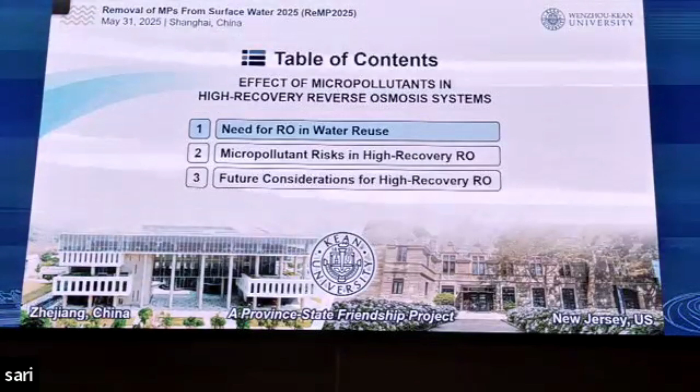...of the micropollutants in high recovery reverse osmosis systems. So let's talk about the need for reverse osmosis in water reuse. We have different water resources available, and each country, depending on their situation, utilizes different water resources. For example, China has a high amount of surface water or groundwater, so they can rely more on supply water or wastewater treatment.

But some countries, like the Middle East area, rely on desalination because they don't have enough surface water sources. And with climate change, the water sources are changing. As you can see on the right figure, desalination and water usage is increasing dramatically. Especially for desalination, membrane-based desalination is dominant right now, and thermal desalination is declining because of the energy usage.

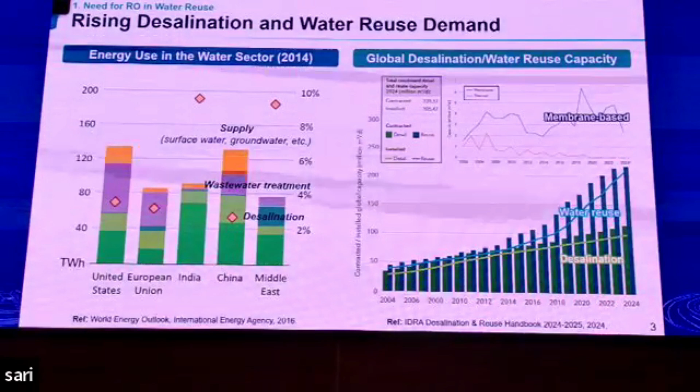Let's talk about desalination and water reuse. For desalination, as I mentioned, Middle East countries focus more on desalination, but seawater desalination demand is also increasing in non-traditional regions. For example, Singapore focuses on independent water security because they import water from Malaysia. Australia experienced big droughts and floods, so they are even expanding their Sydney desalination plant. And Chile has a rising mining industry.

South Korea actually also has abundant water resources, but because of seasonal variation and climate change, they are installing a new big desalination plant for industrial development. And China, due to industrial demands and droughts, is increasing seawater desalination, especially in the northeast region of China. They have factories and need SWRO desalination for water supply.

But the problem of desalination is energy consumption. In 2019, I collected data and analyzed the energy consumption of desalination plants. At the time, the lowest desalination plant SEC was about 3.0 kilowatt hours per cubic meter. After 6 years, we did the analysis again, and it shows that energy consumption can reach 2.8 with larger capacity and advanced membrane technologies.

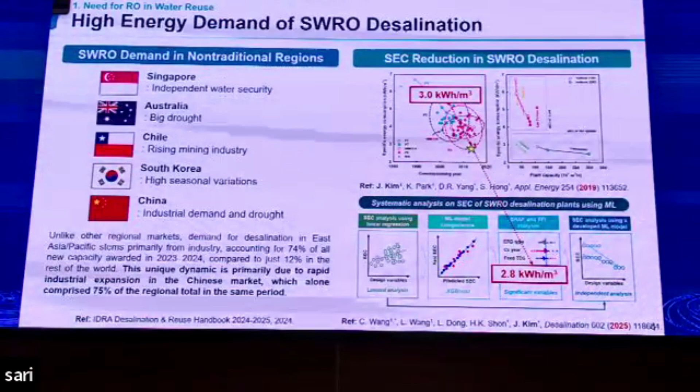But still, its energy consumption is dramatically higher than surface water treatment, so we can focus more on water reuse because it has lower salinity, so the treatment energy consumption can be lower. In the graph, the Asia Pacific region and Middle East and Africa focus more on water reuse. For example, Kuwait has a large water reuse plant and utilizes RO as the end step. Singapore, as is well known, for NEWater utilizes RO and UV for reuse purposes. And Australia also has it.

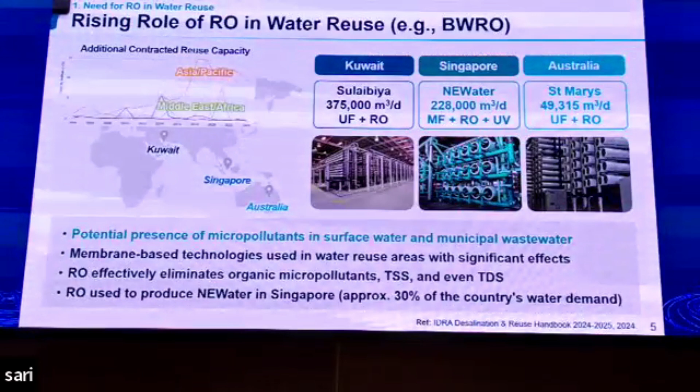RO actually eliminates organic micropollutants, suspended solids, and even TDS, so it can be a promising solution for water reuse. When I saw the description of REMP, I was a little bit curious and nervous because micropollutants are not my research. But still, surface water or municipal wastewater treatment can be my research. And for advanced water treatment technologies, I focus on high recovery RO, so low removal rate, low permeance and fouling can be my work scope.

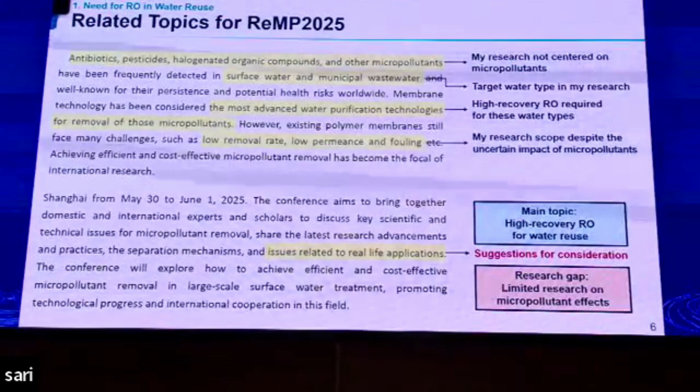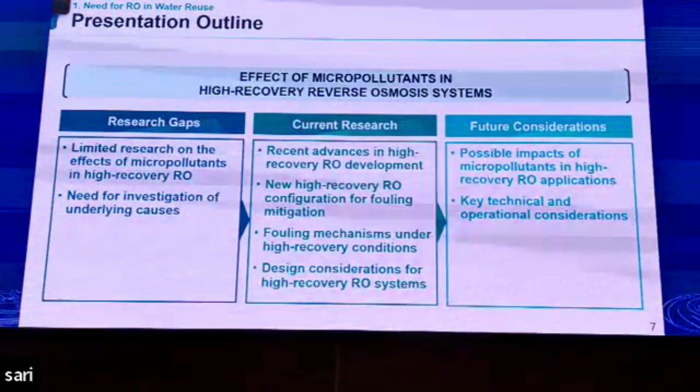So my talk will focus on high recovery RO for water reuse. My research might be limited regarding micropollutant effects, but at least I can suggest some points for consideration, because we have different expertise like membrane synthesis and processes. So I will share my research and some questions we can think about together for micropollutant removal in high recovery reverse osmosis.

I will explain the BWRO configuration first. For water reuse, we are using brackish water reverse osmosis. Reverse osmosis, as you know, has a lower recovery rate. Single stage or single pass is the general configuration, but because of the low recovery rate, they install an additional stage, like 2-stage. For low saline water, they install it without the interstage booster pump to increase water recovery. For higher salinity water, they utilize the interstage booster pump so they can boost water production in the later stage.

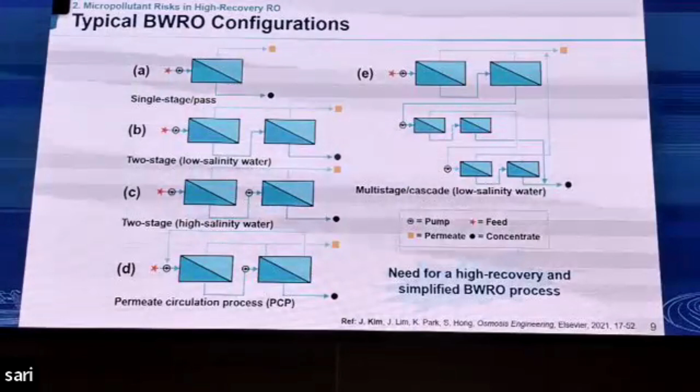A more developed BWRO configuration utilizes a split partial concept for the second stage, recirculating the relatively high saline permeate back to the feed water to keep both quality and quantity. For further expansion, they can utilize multi-stage or cascade designs to increase recovery up to 98%. Some desalination plants adopt this as their second pass design to increase water production. Likewise, for water reuse or brackish water reverse osmosis, high recovery is needed. At the same time, as you can see, BWRO designs are complex, so there should be simplified BWRO processes.

So the current research focuses on the semi-batch or batch design. Multi-stage RO utilizes additional stages for the RO, but this will occupy larger spaces and capital costs. So they are utilizing the concentrate again back to the feed and increase the recovery with the compact size.

And recent studies focus on batch reverse osmosis as well, but that one is a little bit difficult to apply in real cases because there are some pressure control points. So semi-batch RO is utilized much in the industry and recent academia. And the feature of this semi-batch RO is they have a plug flow or closed circuit mode, which means they are discharging and concentrating at the same time.

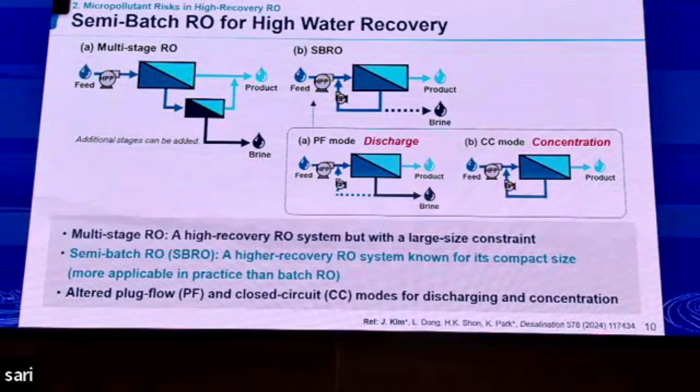And many field and modeling studies have been conducted for the semi-batch RO, but what I realized is their focus and their characteristics can be a little bit different. So for the field study, for example, DuPont has their own semi-batch RO design, called CCRO, and they have a lot of pilot scale applications for the brackish water reverse osmosis condition.

But for the modeling study in academia, they focus more on SEC. So energy consumption is their target for study. But as you can see, practical conditions were not considered in the modeling studies in academia. They don't consider its capacity, and even the recovery is extremely high compared to their feed condition. And also, they don't consider water flux, which is a very critical parameter for plant design.

And even the pump efficiency is extremely high, so they claim the semi-batch RO is an extremely low energy consumption RO configuration, but actually it is not. This is very different from the reality. And also the permeate TDS in real conditions is very important, but in the modeling condition, they don't consider it and ignore it. So those are the differences in the field and modeling studies.

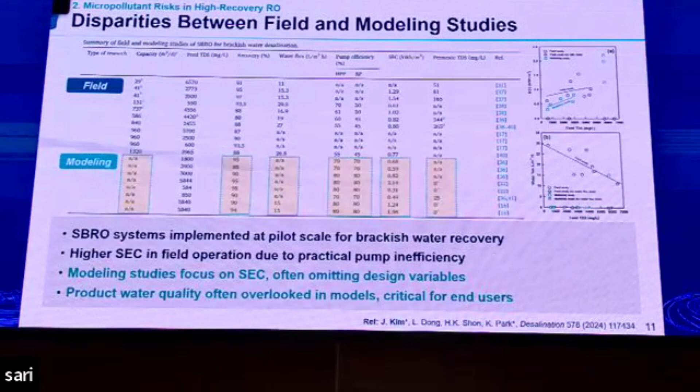And let's think about what will be the potential consideration for micropollutant removal. So I plotted some data for the practical energy consumption range and target recovery based on TDS condition. And also plotted the concentration changes on the concentration side and on the permeate side.

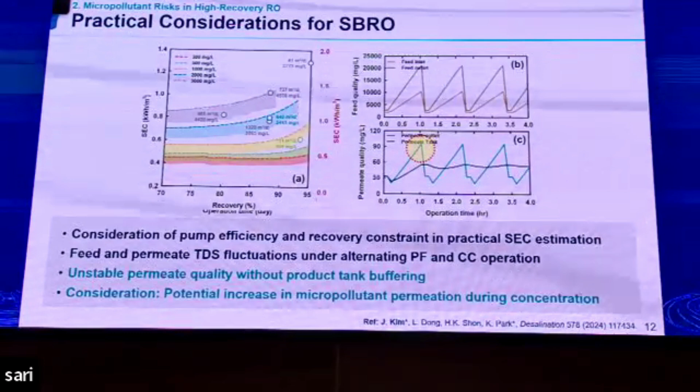But as you can see, the permeate concentration can increase during the concentration and then be lower during the discharge. Which means that there is unstable permeate quality if there is no buffer tank beside. So with the higher permeate production on the concentration side, this might be a potential problem for micropollutant permeation during the concentration. So this point can be considered.

And then after summarizing all the field and academic studies, we can conclude four directions for semi-batch reverse osmosis. First, we need to focus on realistic SEC evaluation because that's their consideration. And permeate quality is often neglected, but as we focus on micropollutant removal, this should be focused on as well. And membrane fouling and scaling can also be of interest, and practical design is also an interest.

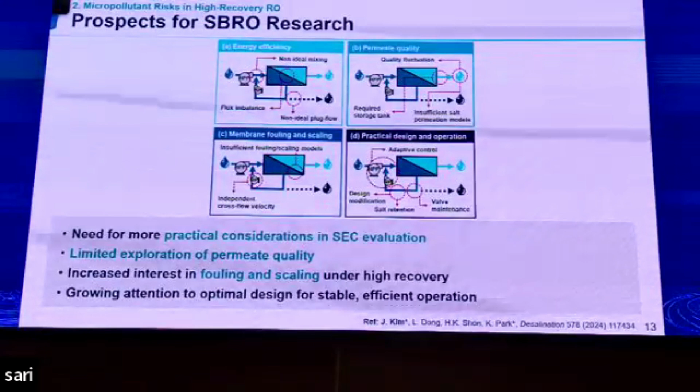So I conducted multiple studies after that, and I will share more questions and findings about micropollutant removal. The first approach that I did with the company is to develop a semi-batch process for reducing the fouling propensity. For the conventional semi-batch, they have recycle processes, but when the concentrate and feed meet, there will be some energy losses. So this will increase the energy consumption.

That's why we are utilizing the jet pump, which will supply the feed and concentrate in the same direction so that we can reduce the energy losses. And for the RO design, they utilize two stages so that we can distribute the flux more evenly, because the front element relatively has high water flux, which will increase fouling formation. But with the two-stage design, they can lower the flux and evenly distribute the flux.

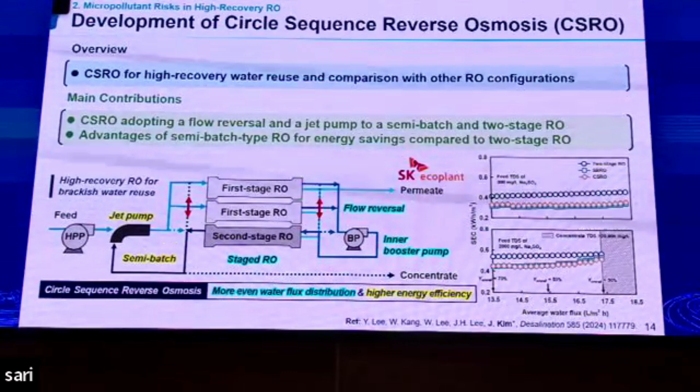And at the same time, they can use the flow reversal technology, which can change the direction of the feed so that they can evenly utilize the membrane and expand the RO membrane lifespan. So that was the approach to develop the fouling mitigating, high recovery reverse osmosis, and we tested it in the wastewater treatment plant in 2023 to 2024.

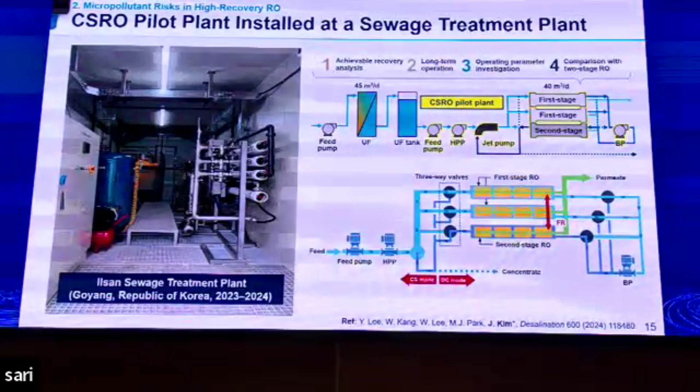So we supply the effluent from the wastewater treatment plant, and we utilize the tertiary effluent as the feed condition, and we use UF for the pre-treatment, and then utilize this high recovery RO for the water production. And I can suggest some points.

So what we realized is the wastewater treatment plants don't consider micropollutants, but they focus more on TDS or other organic compounds. So micropollutants might not be of interest to the wastewater treatment operator. And for high recovery reverse osmosis, their focus is more on energy consumption or recovery rather than micropollutant removal.

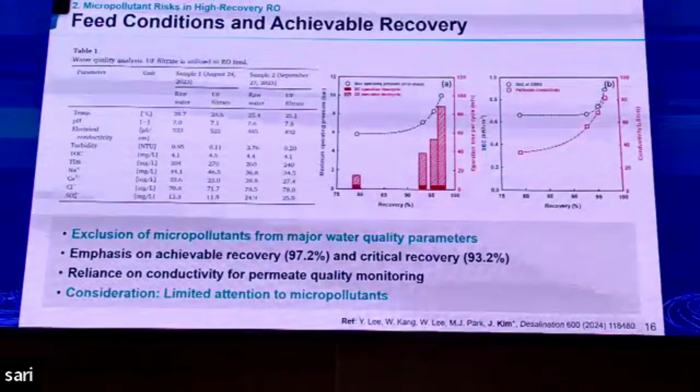So there's a limited attention on micropollutants. Even for the operation of this pilot plant, because they have a high fouling resistance ability, they exhibit relatively stable energy consumption, like 0.71. And they also have a relatively stable permeate production, like 33 microsiemens per centimeter as a feed condition.

But we only monitor the conductivity as a real-time monitoring indicator. For indicating those micropollutants, they need a lab experiment in addition. So that's the limitation for the real-time analysis of the micropollutant, and that will be a potential consideration point for high recovery reverse osmosis.

And for the permeate production, as I analyzed before, there is a concentration increase during the concentration processes. So this will potentially increase the micropollutant permeation during the concentration point. But that concentration point is missing in real application.

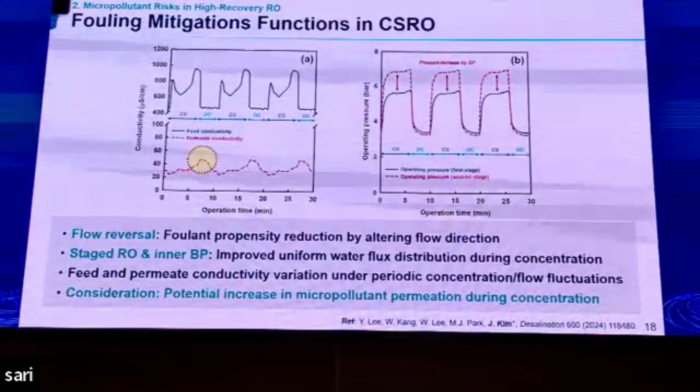And with the successful high recovery reverse osmosis operation, the company is trying to expand their business to the semiconductor industry. Korea is famous for the semiconductor industry, but at the same time, they have a high amount of wastewater. Based on my previous studies, semiconductor wastewater contains some low molecular weight organic compounds, and these should be removed when it is reused as feed water for the semiconductor industry.

But the problem is those low molecular weight organic compounds have relatively low rejection rates, especially methanol, ethanol, and urea. At the same time, this process has UV at the rear. So methanol and ethanol can be removed, but urea is rarely removed with both RO and UV.

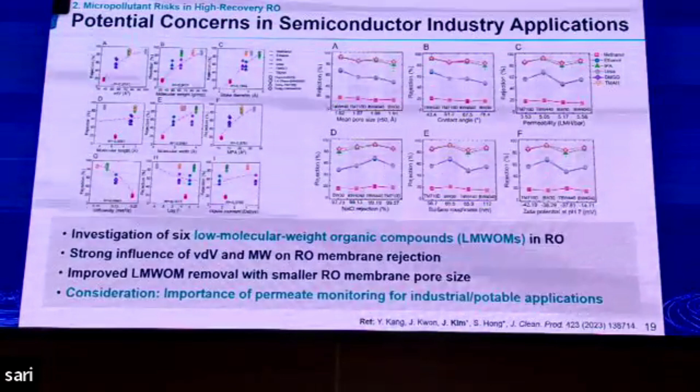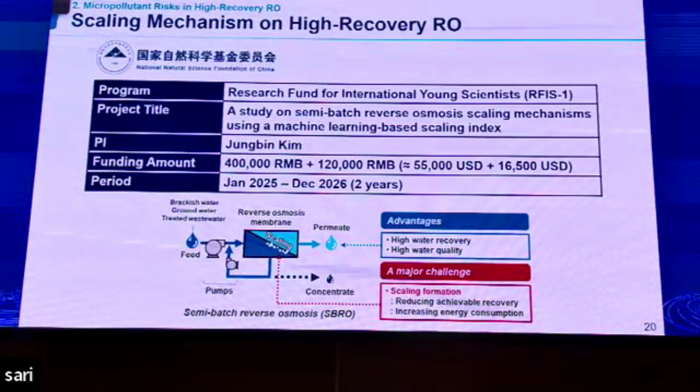So for practical industrial application of high recovery, we need to focus more on permeate monitoring for removing those micropollutants. With this study, I further moved on to the scaling mechanism of high recovery RO. This study was conducted for better understanding of the fouling mechanism, because water from industry might contain divalent ions like calcium and sulfate, which form scaling when the concentration is high during the concentration processes. So my goal was to know the main mechanism for this scaling.

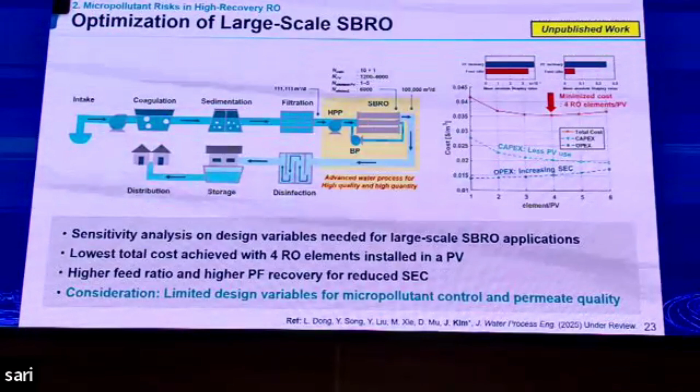I also optimized this high recovery reverse osmosis process, but what I found is there is a limitation of the design variables for micropollutant control and permeate quality. So for better application of RO for micropollutant control, we need more models to predict and control those micropollutants. So I summarized our consideration points, which we can consider for our future research.

For energy efficiency, their key interest is high recovery and low SEC. Micropollutants are not considered in SEC optimization because their effect is minimal, and there is limited SEC impact from micropollutant presence. What about the permeate quality? That will be our focus, maybe.

There is still limited attention to micropollutants, and real-time monitoring is missing. There's a potential increase in micropollutant permeation during the concentration processes, so we can consider how to treat that highly concentrated permeate. We also need permeate monitoring in industrial and potable applications because that might increase the risk. But still, we are not sure about the impact of micropollutants because they are in low concentration.

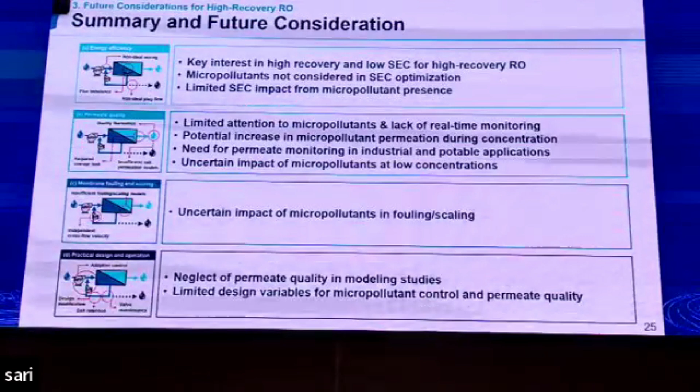For membrane fouling and scaling, micropollutants may affect them, but as we investigated, the flow condition may be the main source of fouling and scaling in the concentration processes. For better practical design and operation, we should focus on permeate quality and micropollutant control so that we can understand the phenomena better and achieve better application.